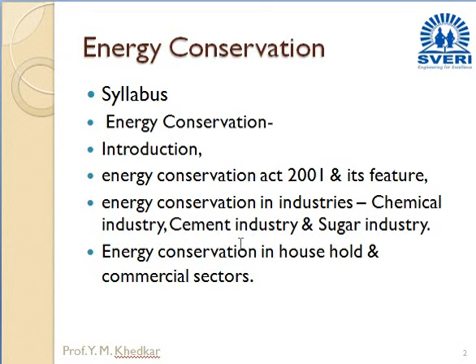The syllabus which we will have to discuss related with the energy conservation is energy conservation, its introduction, Energy Conservation Act 2001 and its features, energy conservation in industries: chemical, cement and sugar industry, and energy conservation in household and commercial sectors. Out of this, the energy conservation introduction and the Energy Conservation Act and its features we have covered in the previous lecture. Today we are going to concentrate on energy conservation in industries and in household and commercial sectors.

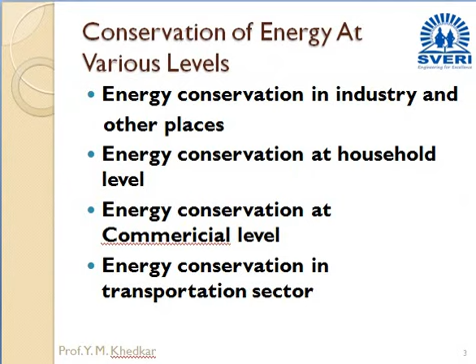We will have to conserve the energy at various levels because we are using the energy at different levels at different places. We will have to concentrate on energy conservation in industry and other places related with it, energy conservation at household level and energy conservation at commercial level. The energy conservation in the transportation sector is also one of the levels which we need to take into consideration during this study.

So, especially when we are going to discuss the first point, energy conservation in industry, we need to think about chemical industry, cement industry as well as the sugar industry. One thing we will have to keep in mind, all these three industries are process industries. Means we are taking some raw material and processing it with the help of different equipments, instruments and machineries, and then we are preparing the final product.

First of all, we will concentrate on chemical industry. Chemical industry in India is highly diversified. It is covering more than 80,000 commercial products which we are using in our day-to-day life. This chemical industry is broadly classified into bulk chemicals, specialty chemicals, agrochemicals, petrochemicals, polymers and fertilizer sector. It is projected to reach 304 billion by 2025. India ranks 14th in export and 8th in import of chemicals, excluding pharmaceutical products, globally.

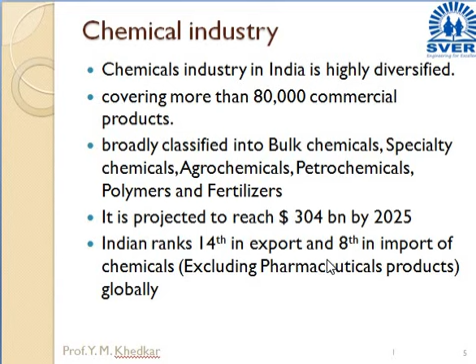So that's why the chemical industry is one of the biggest industries, because it is related with the direct growth in the business sector. It ranks 14th in export and 8th in import, so as far as importing and exporting business is concerned, the chemical industry plays a vital role. So that's why we need to take the chemical industry into consideration during energy conservation.

The next industry is the cement industry. India is the 4th largest producer of cement in the world. The energy cost makes up as much as 40% of the total manufacturing cost. So this is one of the important reasons to save power, because of whatever the manufacturing cost of the cement is, 40% of that cost we are spending on energy. Means if we have manufactured cement worth 100 rupees, then 40 rupees we are investing as the energy cost.

And that's why if we will be able to save the energy in the manufacturing of the cement, then definitely the energy cost is going to get reduced and it will add to the profit, and that's why there is a need to save more energy at cement industry power plants.

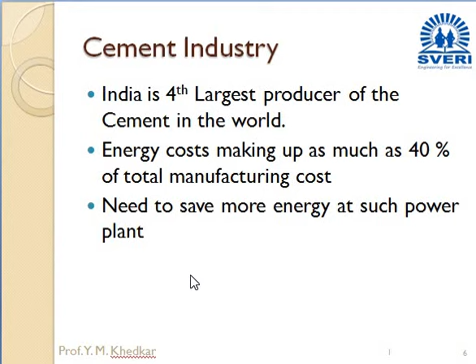Now the third industry is the sugar industry. These sugar industries are more in number in our region, in our area. India is the world's largest producer of sugarcane and second largest producer of sugar after Cuba. But India becomes the largest producer if gur and khandsari sugar are also included. This industry involves a total capital investment of 1250 crores and provides employment to 2.86 lakh workers.

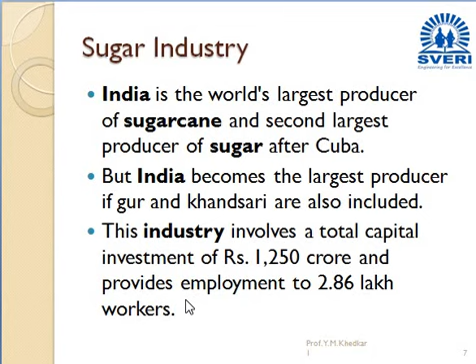So this sugar industry is very large in India, and that's why we have chosen chemical, cement as well as sugar industry for the study of energy conservation at industries.

First of all, we will see what actually energy conservation is. Energy conservation is the practice of decreasing the quantity of energy used for the same quality and quantity of output. It means we will have to decrease the quantity of electricity utilized to produce a product of the same quality and quantity. It may be achieved through efficient energy use, in which case energy use is decreased while achieving a similar outcome, or by reduced consumption of energy services.

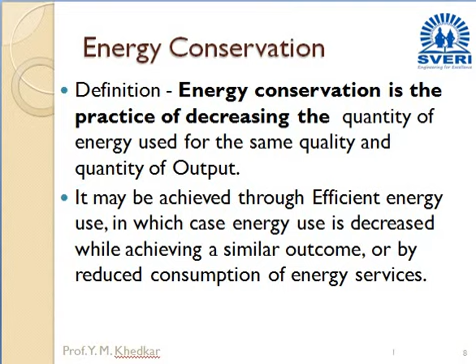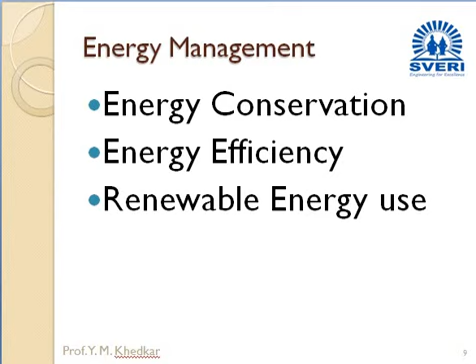Means we will have to take energy management into consideration in the process. The first part is energy conservation, the second part is energy efficiency, and third, by using renewable energy we can manage and conserve the energy. So the first part in the energy management system is energy conservation. Energy conservation includes any behavior, act or practice that results in the use of less energy, means less electrical energy or heat energy.

It will focus on behavior of the people. People should act, people should practice such a process through which we can save the energy. For example, one example is using daylight through windows rather than turning on the lights.

For example, if we can construct the windows at the proper place, then during daytime there will not be a requirement of any electrical light. So if we take that simple care during the construction, then definitely we can save the light during the daytime. So such kind of practice, process or behavior we need to follow, we need to take into consideration.

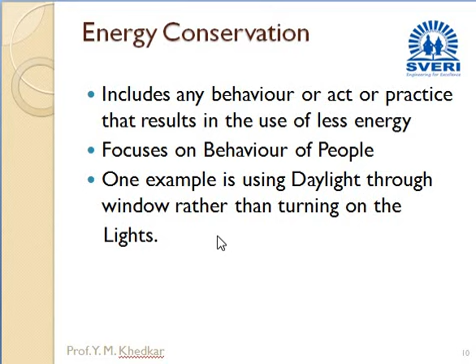In this energy conservation process, it has been mentioned that we will have to use the energy in an efficient way. It means what? We will have to involve the use of technology that requires less energy to perform the same function. It will focus on equipment or machinery being used. So one example is installing LED light bulbs for the street lights. Here we need the light during night time.

If instead of the bulbs or the tubes we put up LED lights, then definitely it will consume less energy, but we will get more output. It means by consuming less input, if we are in a position to get the required output, the efficiency will be higher, and that efficient energy use can help to conserve the energy.

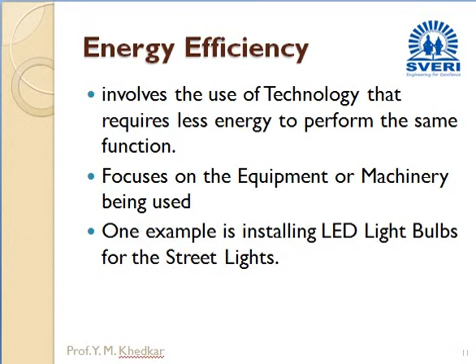And the third part in the process is use of renewable energy. Renewable energy and non-renewable energy we have already studied, but renewable energy is the energy obtained from sources that are essentially inexhaustible. So such kind of inexhaustible sources we can use. It focuses on resources such as wind, solar, geothermal, and one example is installing a solar power plant.

So this solar power plant can produce electricity by using the solar radiation during the daytime, and it can be utilized for some of the equipment directly. For example, street lights, to run the ACs, to run the space heating system, to heat the water. And if we can use solar power to satisfy all such needs of the process, then definitely we can conserve the energy.

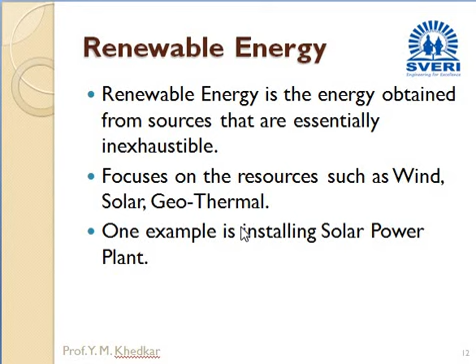In industry, we are using different industrial equipment. So the industrial sector uses both thermal and electrical energy in various equipment. It means in the cement industry, chemical industry, as well as sugar industry, both thermal and electrical energies are utilized. The various equipment used are boilers, compressors, furnaces, diesel generating engines, motors, pumps, and refrigeration and air conditioning, etc.

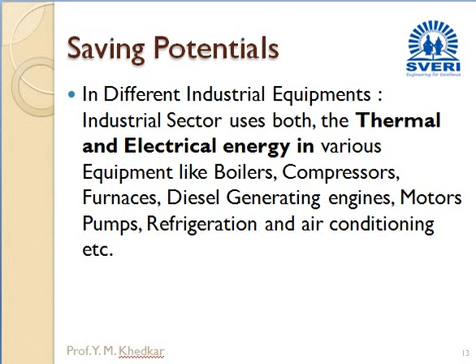So if we save the energy during the use of the equipment mentioned in this slide, then definitely we can conserve the energy. Almost all three industries mentioned here are using all this equipment, so we are going to study energy conservation in such equipment. That process will be a three-stage process, named stage A, stage B, and stage C. And at each stage we are going to discuss the conservation of energy in the industrial sector.

First of all, we will concentrate on electrical energy saving, that is part A. Here are some tips for electrical energy saving. Number 1, improve the power factor by installing capacitors. Number 2, avoid repeated rewinding of motors. Number 3, use variable frequency drives and fluid couplings for variable speed applications such as fans, pumps, etc., which will help in minimizing the consumption of electricity.

It means we will have to first of all improve the power factor, and number 2, for equipment running at variable speed like fans or pumps, we will have to use variable frequency drives. Frequency drives can control the speed, and whatever optimum speed is required, we can set that drive and get the variations in the speed. For example, we can put a regulator on the fan, or a different phase system on the pumps. So by adjusting the frequency, we can control the speed.

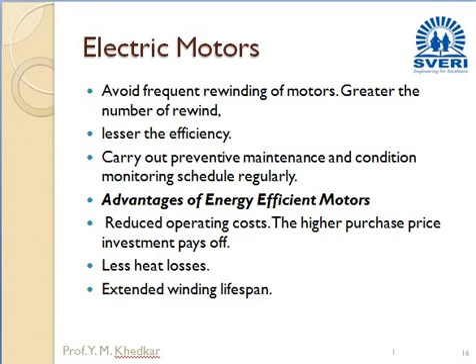The second equipment which we run with the help of electrical energy is the air compressor. Compressed air is used in almost all types of industries and accounts for the major share of electricity used in some plants. Compressed air is very energy intensive. Only 5% of electric energy is converted to useful energy, so the remaining energy is definitely wasted. So use of compressed air for cleaning is rarely justified. Compressed air should be used whenever it is necessary. If it is not necessary, then there is no need to install and run air compressors in the field.

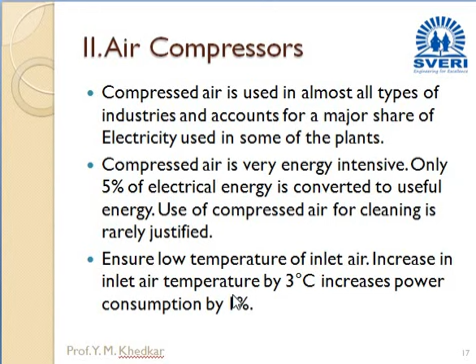We have to ensure a low temperature of inlet air at the air compressor, because an increase in inlet air temperature by 3 degrees centigrade increases the power consumption by 1%. So instead of providing hot air at the inlet of the air compressor, we have to take care that the air has a low temperature rather than a high one. Such a small change in behavior or in the process can save a very large amount of energy consumption.

The third important equipment utilized in industry with electrical energy is the cooling tower. A cooling tower is a specialized heat exchanger in which two fluids, air and water, are brought into direct contact with each other to effect the transfer of heat. The replacement of inefficient aluminum or fabricated steel fans by molded FRP fans with aerofoil design results in electricity savings in the range of 15 to 40%. It means instead of using simple fans made of aluminum or fabricated steel, we should use molded FRP fans with aerofoil design, which can save 15 to 40% of the electrical energy.

We need to install automatic on-off switching of cooling tower fans, and we can save up to 40% of electricity cost. It means if we get sufficient cooling temperature, the cooling tower fans should be switched off automatically, and when the temperature starts rising again and reaches or goes beyond the limit, the cooling tower fans should come into action and switch on. Such an automatic system we can install with simple sensors, and we can save once again 40% electricity.

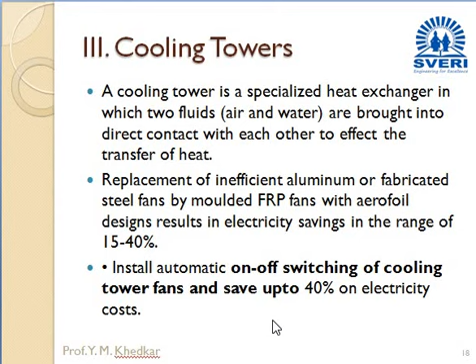One of the very important equipments in the industrial sector is the pump. Most industrial processes in and out of the plants involve transportation of fluid. It may be steam, water or another fluid in the form of chemicals, and the pump is the only mechanical means available to facilitate this transportation. We can transport the fluid by use of pumps only.

The prime mover can be either an electrical motor, a diesel engine, or a steam or gas turbine. It means the prime mover which moves the pump, giving rotation to the shaft of the pump, may be electrical energy, a diesel engine, or a steam or gas turbine. All prime movers consume energy either in the form of electrical power or by using precious petroleum products like diesel, oil or gas to impart working capacity to the pump.

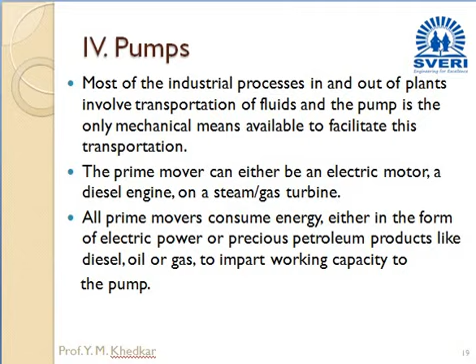So, we can save electricity by following the given inputs efficiently. We can select a pump of the right capacity in accordance with the requirement. If our capacity is low, if we require less fluid to pump, then there is no need to install a pump with larger capacity.

The improper selection of pump can lead to large wastage of energy. A pump with 85% efficiency at the rated flow may have only 65% efficiency at half the flow. So, if flow decreases, efficiency also reduces. We have to take this into consideration and select the pump according to the right capacity in accordance with the requirement of pumping the fluid.

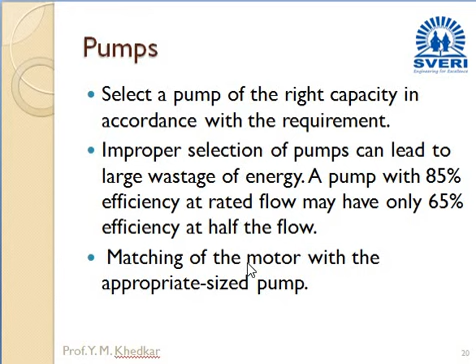The matching of motor with the appropriate size pump is also one of the important factors. We will have to take the capacity of the pump into consideration, and according to that only we will have to put the motor in use.

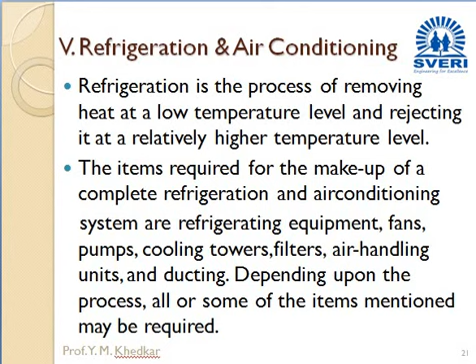The fifth important equipment is refrigeration and air conditioning equipment. Refrigeration is the process of removing heat at a low temperature and rejecting it at a higher temperature level. The items required for the complete refrigeration and air conditioning systems are equipment like compressor, fans, pumps, cooling towers, filters, air handling units and ducting. Depending upon the process, some of these items may be required and some may not be required every time during the use of refrigeration and air conditioning.

Next is the lighting system. We know that industries are running most of the time 24/7. So, lighting system and proper light arrangement is required near every equipment or machine which is part of the manufacturing processes.

Use of electronic ballast in place of conventional chokes saves energy up to 20% in the lighting arrangement. Use of CFL lamps or LED in place of GLS lamps can save energy up to 70%. So, we will have to remove simple bulbs or simple tubes and replace them with CFL or LEDs. Cleaning of the lamps and fixtures regularly is important, as illumination levels fall by 20 to 30% due to collection of dust.

So, cleaning of the lamps and bulbs is very much required, because if dust is deposited on them, the illumination level will fall 20 to 30% and we will need to start more lights in that particular case.

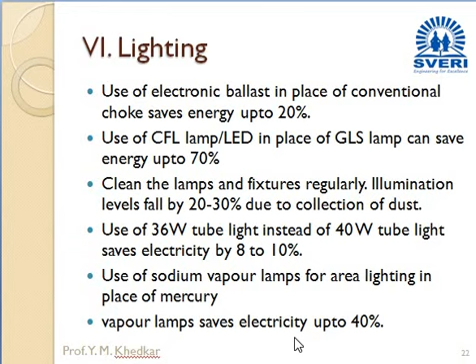The B part is related to the saving or conservation of thermal energy, and there are certain tips for thermal energy saving. Number 1, undertake regular energy audits.

It means we will have to go for energy audits continuously at the plant to save thermal energy, and from such energy audits or during maintenance, we can find many kinds of problems in the machines or in the process.

For example, we will have to take care about the leakage of oil. If oil leakage is of 1 drop per second, then it can create a loss of 2000 liters per year. So, we know that such little drops of oil also can create a big waste or big loss.

in the oil which we are using in our industry. Oil is one of the petroleum products, so it is costly and it is an exhaustible source. That's why we will have to take care during the use of oil in the industry.

We will have to use filtered oil at every stage, because impurities in the oil can affect the combustion, and if the combustion process is affected, it will not produce proper heat. It will directly affect the efficiency.

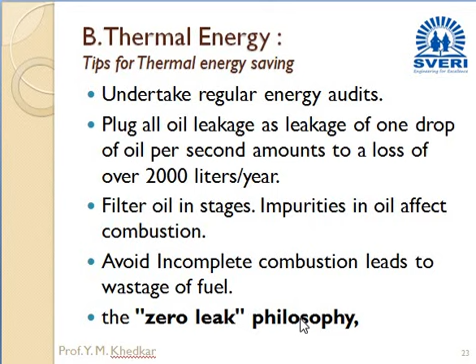We will have to avoid incomplete combustion which leads to wastage of fuel, and that's why we will have to apply the zero leak philosophy. We should not allow any machine to go through any leakage process, and such leakage should not be there in the process of combustion also.

Here some of the equipments which we are going to discuss here are part of the thermal energy production process.

The first equipment which is very much necessary in thermal energy production is the boiler. Boilers are used in various industrial units to convey heat for different process applications.

We will have to control excess air by monitoring oxygen level in the flue gas, because if oxygen level decreases, combustion will not be proper, and if that level increases, white fumes may be produced. That will also lead to losses in the combustion process.

We will have to remove the soot deposit when flue gas temperature rises to 40 degrees centigrade or beyond. We will have to improve boiler efficiency by addressing flue gas losses, radiation losses, and incomplete combustion.

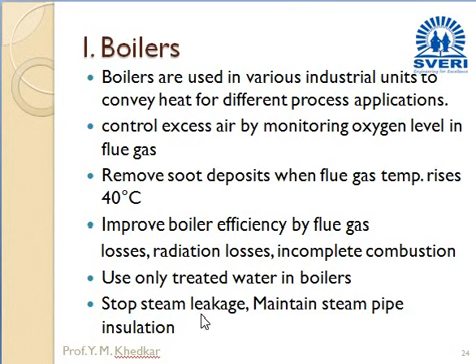We will have to take care during combustion and avoid heat losses from the boiler. That's why we must use only treated water in the boiler, stop steam leakage, and maintain steam pipe insulation properly.

The next equipment is the diesel generating set. Depending on the type of industry and magnitude of connected load, diesel generating sets are employed in various modes. We will have to bring the diesel generating set into working at some places.

For example, in standby mode to meet part or the full requirement of the plant in case of power failures, we need to install the diesel generating set. Sometimes peak load mode occurs, and to meet that requirement we will have to reduce the maximum demand and put the diesel generating set on.

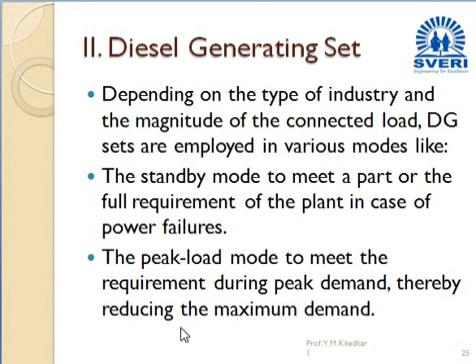We need to take care of the diesel generating set with some suggestions. Number one, we will have to maintain the diesel engine regularly. We will have to check all the connections, check the fuel and its quality, and check if there is any leakage. Such things will be optimized with the help of maintenance of the diesel engine.

A poorly maintained injection pump increases fuel consumption by 4 grams per kilowatt hour. That's not a simple thing for energy production. Blocked filters increase fuel consumption by 2 grams per kilowatt hour, meaning if your fuel injection pump and filter are not working properly, 6 grams of fuel per kilowatt hour will be wasted.

Measure the fuel consumption per kilowatt hour of electricity generated regularly. From that we will come to know whether the fuel we are utilizing is helping convert energy into the proper kilowatt hours or not.

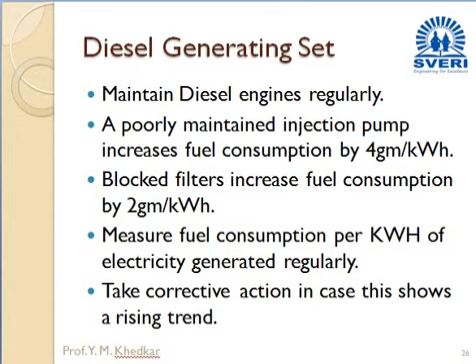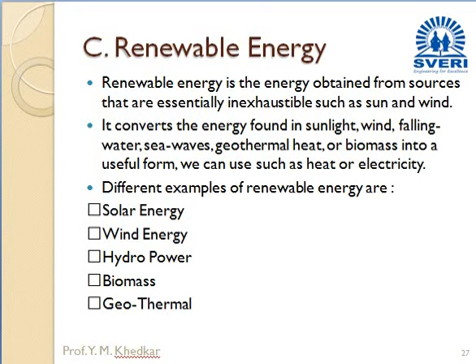These precautions which we take in part A, electrical consumption of energy, then part B, care in conservation of heat energy, and part C, using renewable energy, can help us conserve energy at the industry.

We will have to take one help, there is a need of energy audit, from which it will be clear whether energy is conserved properly or not.

This energy audit means the verification, monitoring and analysis of the use of energy, including submission of a technical report containing recommendations for improving energy efficiency with cost benefit analysis and an action plan to reduce energy consumption. That cost benefit analysis and action plan will help us reduce energy consumption, leading towards energy conservation.

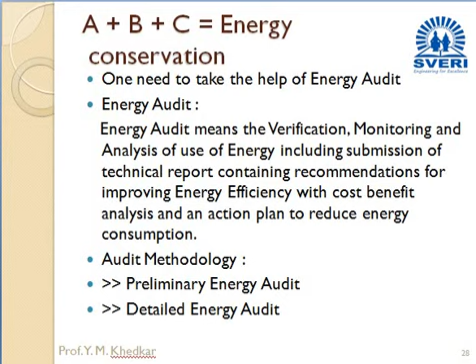Audit methodology and details regarding the audit have been seen in the previous part of this chapter. Now we will move towards our next bit, which is energy conservation at household levels.

Energy conservation is a major application in domestic use. We can conserve energy in refrigeration by keeping the refrigerator temperature higher. It should not be very low, because maintaining a very low temperature consumes more energy. So an optimum temperature should be set at the refrigerator.

There should not be continuous opening and closing of the refrigerator. We should open it only when required. Such small tips can conserve energy in the refrigerator sector.

At the same time, all domestic appliances we use should be standard, with a proper label provided giving us information about the energy use during operation.

Second, we can conserve energy while using the microwave oven. Whenever it is required, then and only then should such equipment be used.